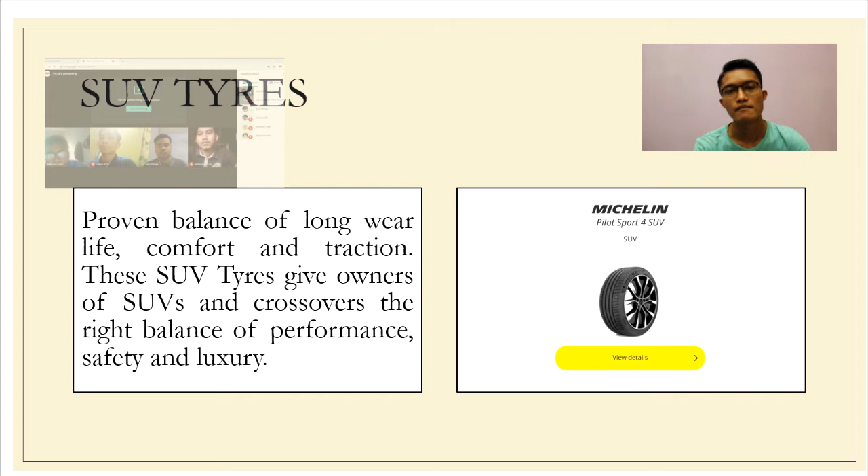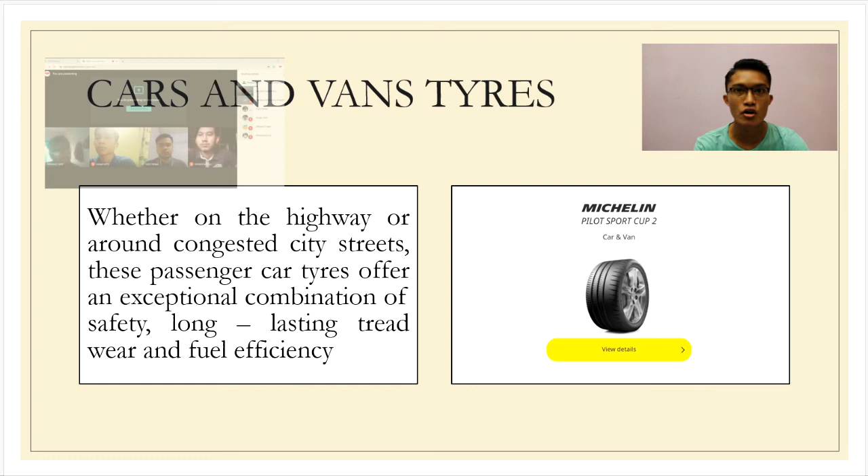Furthermore, car and van tires, whether on the highway or around congested city streets, this passenger car tire offers an exceptional combination of safety, long-lasting tread wear and fuel efficiency. These tires are suitable for cars like Axia, Iriz, Proton family cars.

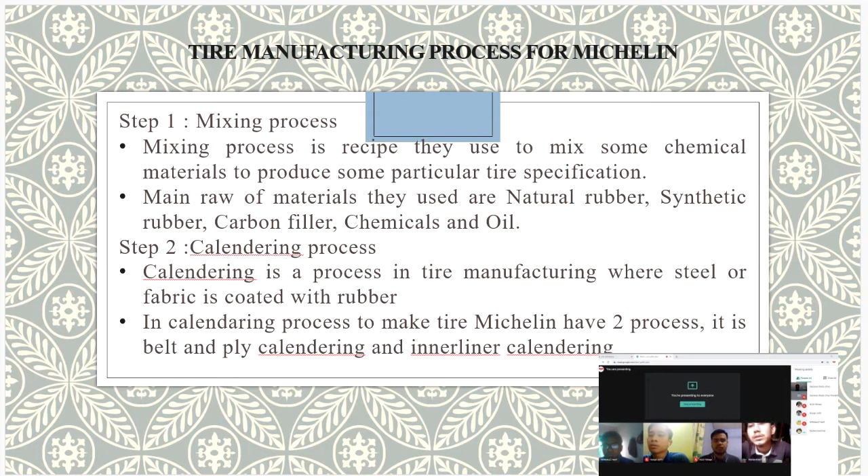The third process is the building process. Building process includes the assembly of side wall rubber, the books containing tread rubber, and these are all delivered to a skilled assembler at the tire building machine. The components of the tire include bead, plies, sidewall, and tread. After the components are assembled, the tire is often referred to as a green tire.

The last process is the curing process. Curing process is used to give the tire its final shape and tread pattern. It involves cross-linking of rubber and vulcanizing agent, resulting in an elastomer. During the curing process, steam brings the temperature up to 280 degrees. The time in mold depends on the characteristics desired in the tire.

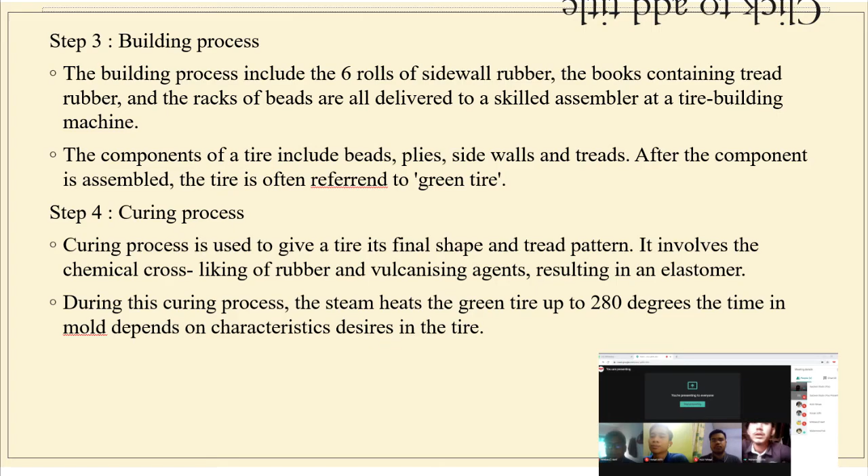Next I will present about the types of materials. According to research, Michelin produces tires using about 200 raw materials. They don't use all 200 materials at the same time; they combine the materials according to the performance of the tires they want to produce, or in other words, according to what the customer needs and requires, for example the strength or flexibility of the tires.

So the pillars of the materials are rubber and other reinforcement materials like metals and textile reinforcements. The rubber compounds are made up of elastomers, reinforcing fillers, plasticizers, and other chemical elements. And other than rubber, what else is there?

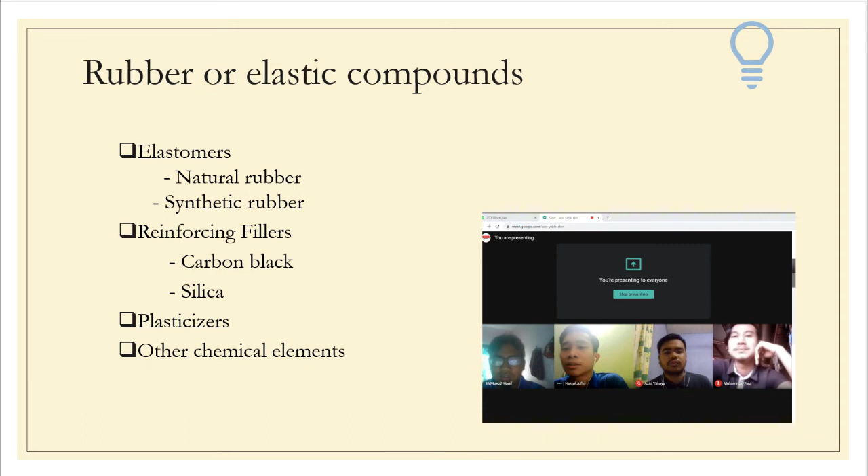So obviously tires are made from rubber. Other than rubber, Michelin also uses reinforcement materials like metal and textile reinforcement. So what are the functions of these two materials? Metal reinforcement provides a strong physical chemical bond between the rubber and steel, and textile reinforcement plays an important role in high performance and high speed tires. So that's a little bit about the types of materials they use to produce the tires.

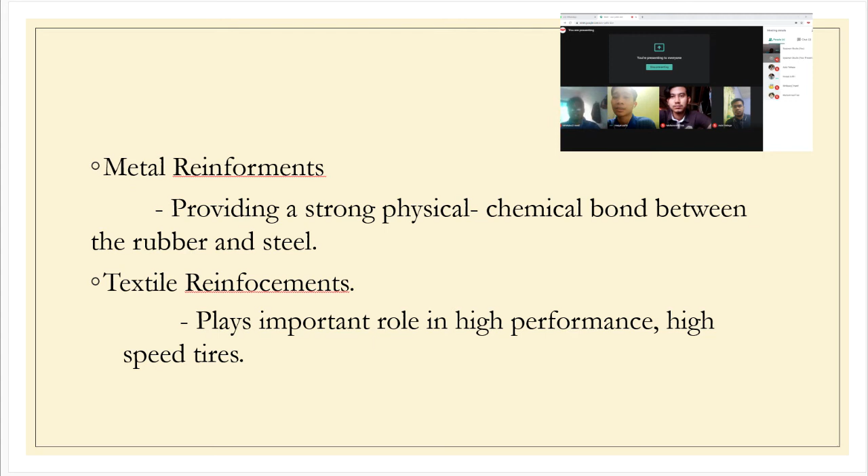Thank you. Now I will present about the advantages and disadvantages of the entire tire process. First is the mixing process. The advantage of the mixing process is, first, reducing the incorporation time.

Second is mass of ingredients, which means in this mixing, the mixture technology can mix over 200 ingredients to make the green tire. The disadvantage of this process is dispersion of chemical substances, which spreads the chemical substances among the workers. That's why the workers have to use masks to protect themselves.

Next is the calendaring process. The advantage of this process is good handling of polymer and good mixing of polymer, and of course this calendaring process has a versatile machine. The disadvantage of this process is that it's very expensive, because one part of this calendaring process is so expensive, and it's not good for too high or too low of gauge.

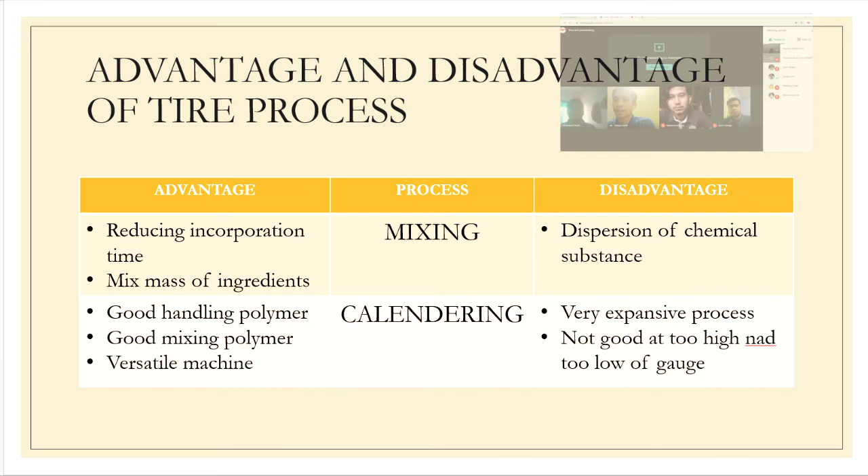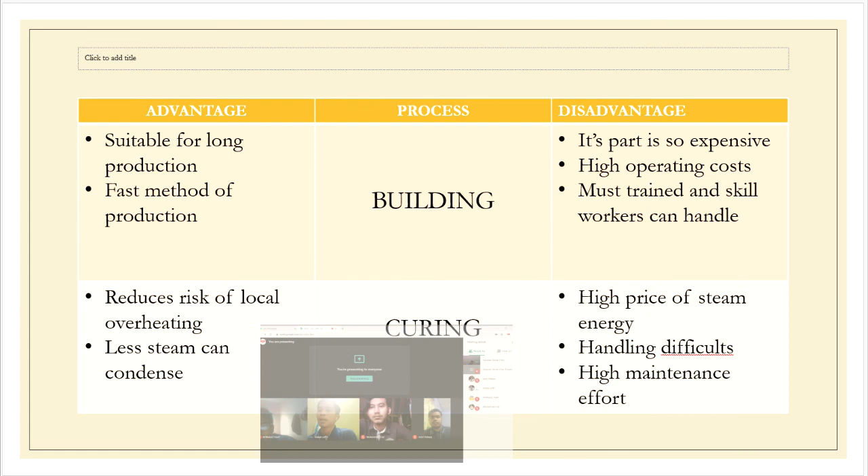Next is handling difficult in curing process and high maintenance effort. So that's all for me, thank you.